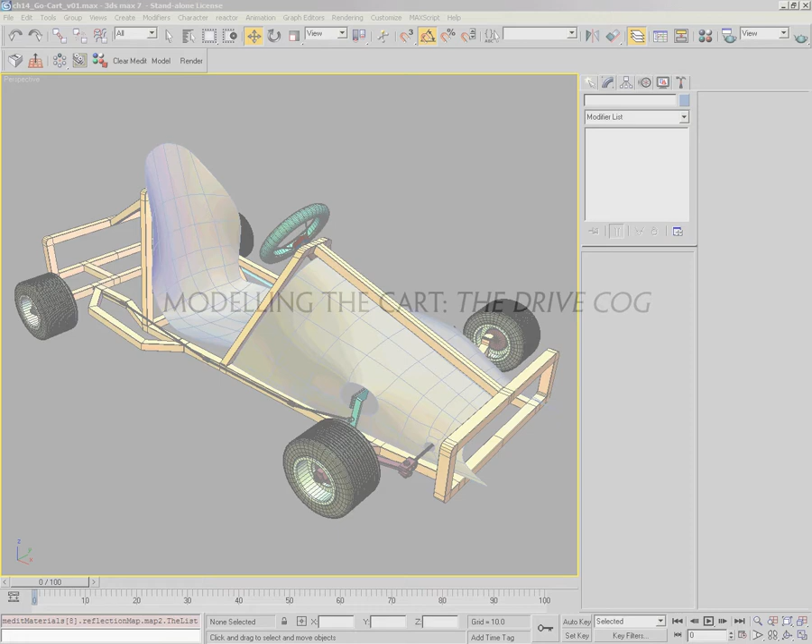In this chapter, we're going to finish off this section of the DVD where we've been modeling elements of the go-kart using sub-Ds. We're going to finish off with a little bit of a tough nut, so I'm just going to hide the elements we modeled in the last chapter, and focus in on this cog over here.

What I'm going to do is put some smoothing on it to make it a little more interesting looking, and then put some teeth along the edge here to make it into a full cog. But before we do that, let's put an edit poly modifier on here, and make some changes to the model.

Firstly, I'm going to get this edge here, do a loop selection, and pull it over here. I need to make this cog quite a bit thicker, so there we go. We'll do the same thing here, loop, pull it over. Let's do this from the top view so we can see that it's even. There we are, that looks pretty good.

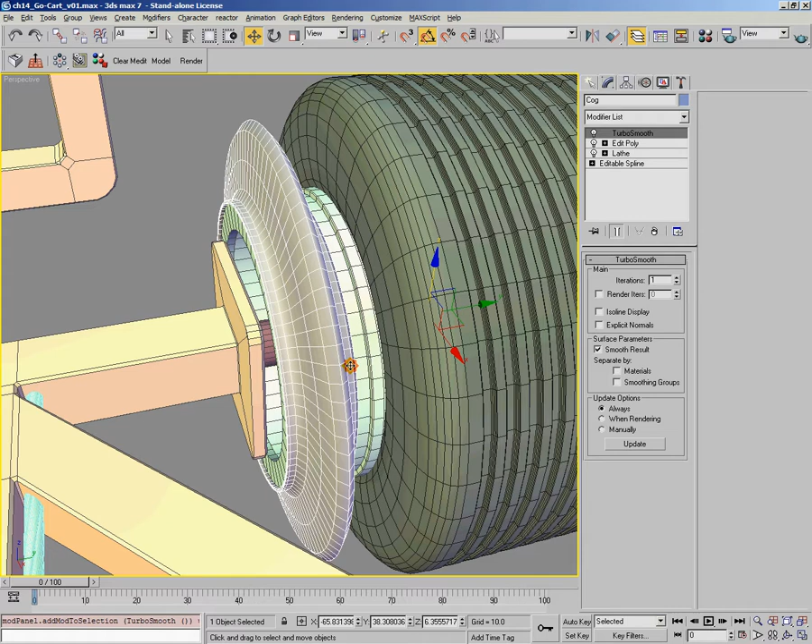Now if we put a sub-D modifier on here, let's put a turbo smooth on. You can see one of the problems immediately is it becomes too soft. We've basically lost the hard edge form, which I really want to keep because this is a cog.

It's an engineered item. It would be lathed, and then I guess the teeth are welded on, or it could be cast I suppose. But basically it would be a relatively hard edged item.

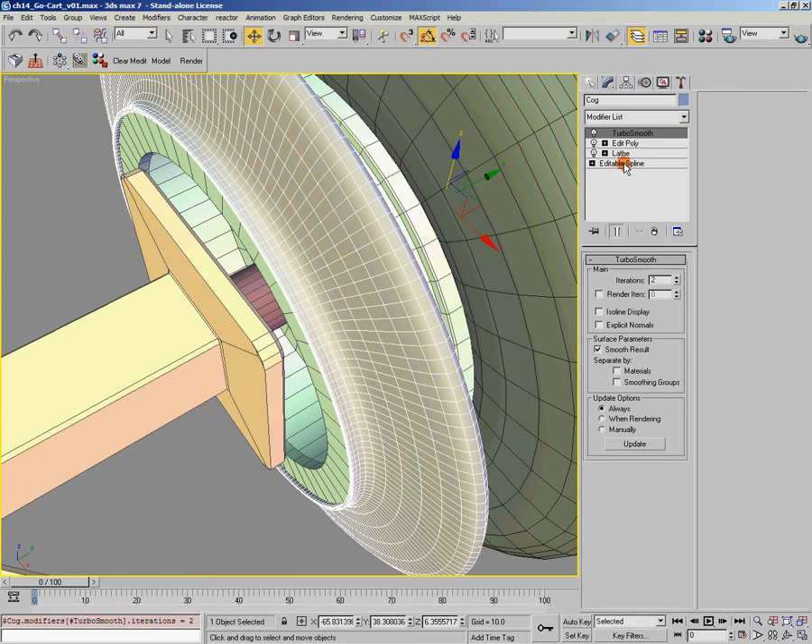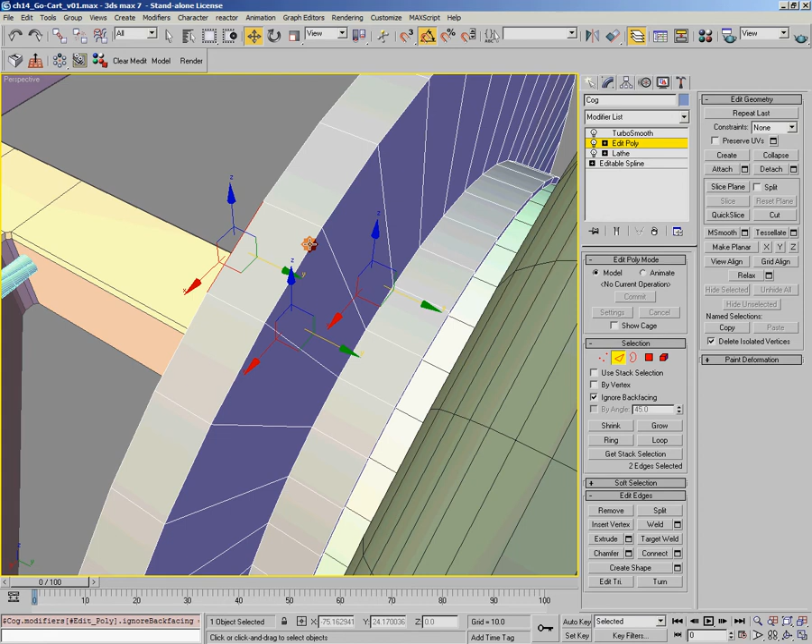So let's go back down here to edit poly, go back into subobject mode, and what we basically need to do is add some beveling into these edges here. This is already beveled, so we need to get this edge here, this one here, this one. Let me just turn on ignore backfacing, makes selection a little bit easier. Basically any edges which aren't beveled.

There we are. I'm going to loop select those, so we've got all the edges going round. We'll turn on show end result, and then we'll just go and chamfer, and see what we get here. You can see this is going to give us our hard edges back, as you can see here.

Just cancel that, and we'll turn off end result because I want to see what I'm doing here. I want to make these nice and hard, so let's go chamfer, put up some values here, and then we'll put some more edges in here. So we'll just apply that. Let's go like that, apply, and then we'll make a smaller value here. Yep, that looks pretty good. Okay, that, and have a look up here.

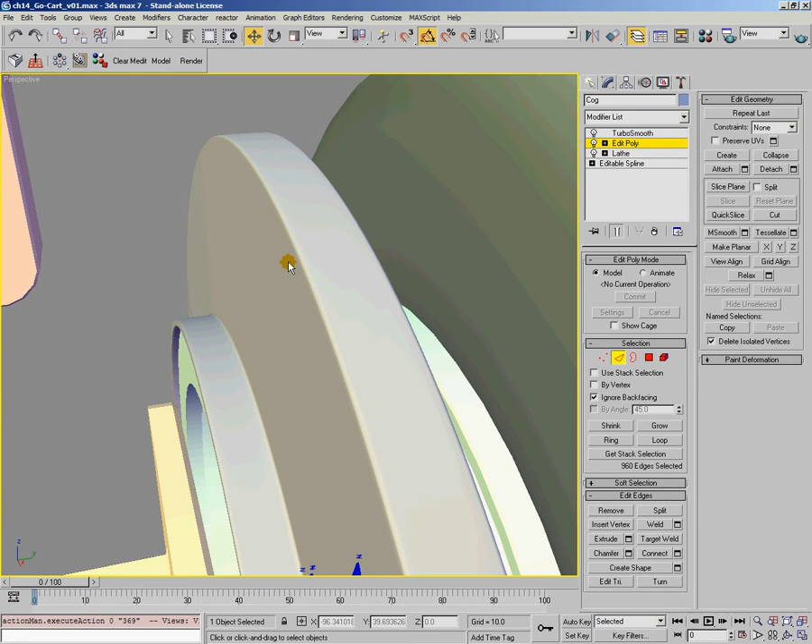Yeah, that looks okay. If we show end result, you can see now we've got some nice hard edges there. But even though I say they're hard, they still have bevels on them, chamfers, which means they'll pick up the light a lot better. So that's the basic part of getting the sub-Ds to work okay on here.

What we need to do now is the teeth. So for that, let me just put wireframe mode back on here, and go back down to the base mesh. Turn off show end result, and what we want to do is get one of these faces and detach it here. Let's shift copy that, copy it to an element, go up here, detach, and now it's a different object. So now I can actually go out here, and we can just select this object here.

I'm in a bit of trouble getting it selected there. There we go. So the first thing we're going to do is go into subobject mode, and I just want to make sure I can isolate this from all the teeth around it. So I'm just going to select here, connect, and turn on edge here, slide this into position here, connect. Let's try and get it as even as we can.

Okay, now what I want to do is extrude this out somewhat. Let's zoom out so we make sure we don't extrude it too much. That's obviously a bit too much, so let's dial this down. Group normal is okay, so we're just going to roughly get this right.

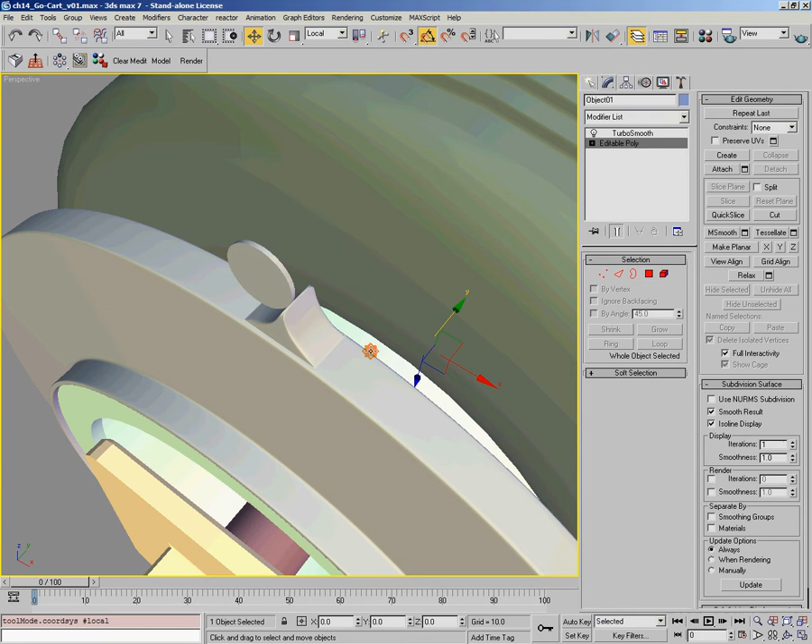Now what we need to do is just repeat this all the way around. And what I'm going to do is turn off Turbo Smooth. I'm actually going to delete it because we really don't want to have Turbo Smooth applied at one level as we do it next. Now there's two ways we can create the teeth on this cog.

We can either instantiate this individual cog tooth you see here and keep them as instances, which would probably be the most efficient way to build this geometry. The other way is that you could copy all of these teeth and then attach them together again and turn them into one object. This would be maybe a little easier to handle, but it wouldn't be as efficient in terms of rendering, because a lot of rendering engines have the ability to handle instance geometry in a much more efficient manner.

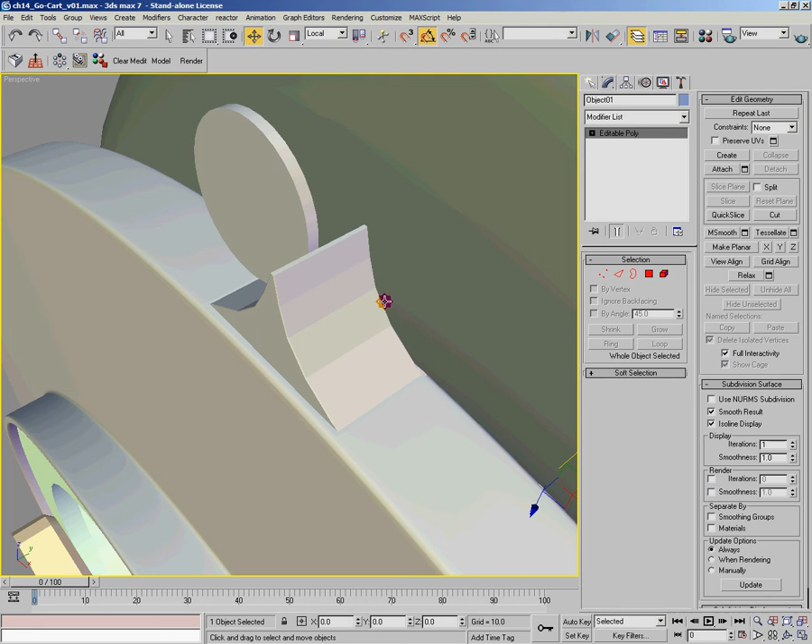So what we'll do here is, first of all, we'll just create this geometry going round, and then we'll decide what we're going to do with it. So create it first as instance geometry, and we'll give it a name so we can recognize it more easily.

So let's just select the cog tooth, and we'll call it cog tooth 01. It shares the pivot point of the original lathe it was built from, so we don't have to get the pivot point of this and align it to the lathe. Because it was detached from the lathe, it has the original pivot, so we can basically array around that point.

So I've got the extras tool panel visible up here. I've added a couple of extra commands which allow me to change whether I'm using my modeling lights or my rendering lights, and those are just simple macros. If you want to find out about macros and Max scripting, check out our Max Script Fundamental DVDs, where you can find out how to create little macros like this to, in this case, turn on some lights and turn off other lights. This script basically does the opposite, just turns on and off the opposite lights.

But in this case, I'm not going to use a custom command. What I actually need here is the array tool. So what I need to do is array this tooth around a circle, and if we go back and look at the original lathe, you'll see it has 48 segments. So we have to use that many segments to get a nice match with this.

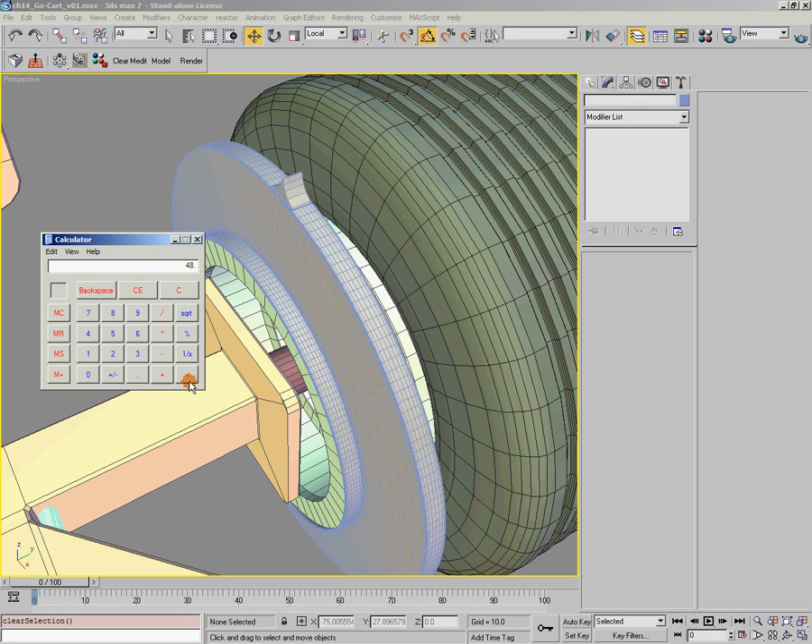Let me just get out the calculator here. Here's the old Windows calculator, and we'll do a very simple piece of maths. 360 degrees divided by 48 cogs equals 7.5 degrees per cog.

So we can now select the cog tooth and run the array tool, as you can see here. They improved it greatly in a recent release of 3ds Max, I think it was version 7 actually, and they added the ability to preview what you're doing either as a box or as actual geometry. We'll turn that on, and that will show us our teeth.

You need to find the axis you need to rotate around. You can see here you can actually array by moving, as you can see, or you can do it by rotating, or you can scale - you can create scaled arrays.

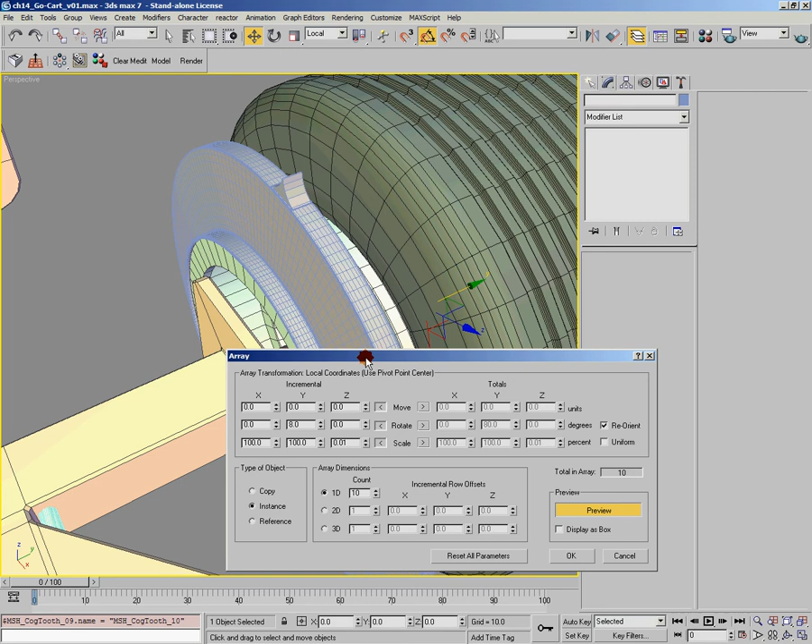Now in this case we need to do a rotation, and we know it's 7.5 degrees, and I know from previous experimentation that it's on the Y-axis. So if we crank this up here... actually it doesn't seem to be working correctly. Let me just cancel that for a second, and let's just go to view. There we go, and we'll run the tool again.

So let's just try that again. Turn on preview. There we go. It was because we actually had local coordinates turned on, so it was creating an array around its own axis, which wasn't quite correct. We needed to change it to view to actually be on the y-axis.

So that's it with 8 degrees. We know we need 7.5, so we're going to have to do a type in. And we need more than 10 teeth, we need 48 in fact. We just increase the count until we have, oh yeah, 48 teeth. As you can see, it matches it perfectly. So it goes around 360 degrees, 7.5 degrees per cog. 48 cogs gives you the full 360 degrees.

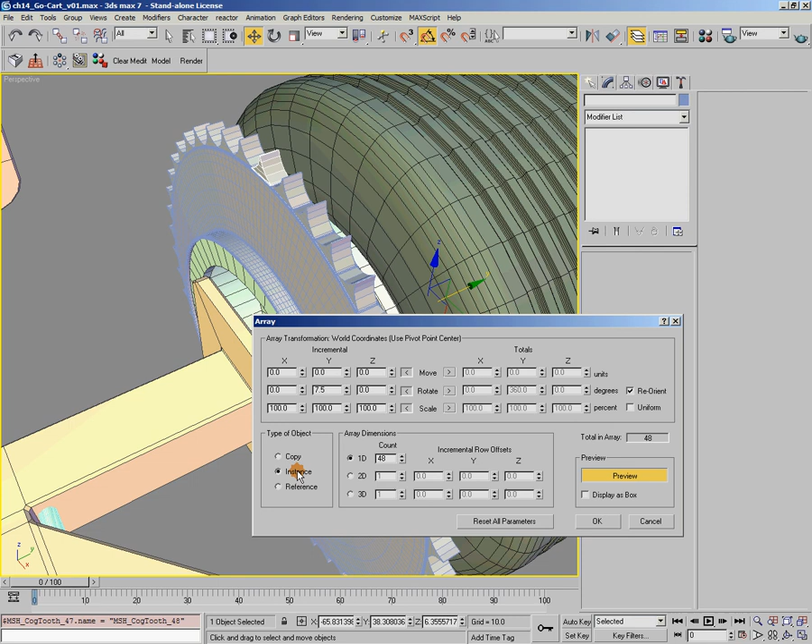And type of object, we can either do copies, instances, or references. In this case, we're going to go for instances. So we'll just OK that. And there we have the teeth, as you can see. And all we need to do now is put some smoothing on there. Let's just go turbo smooth. This will be an instance modifier because these are instanced objects.

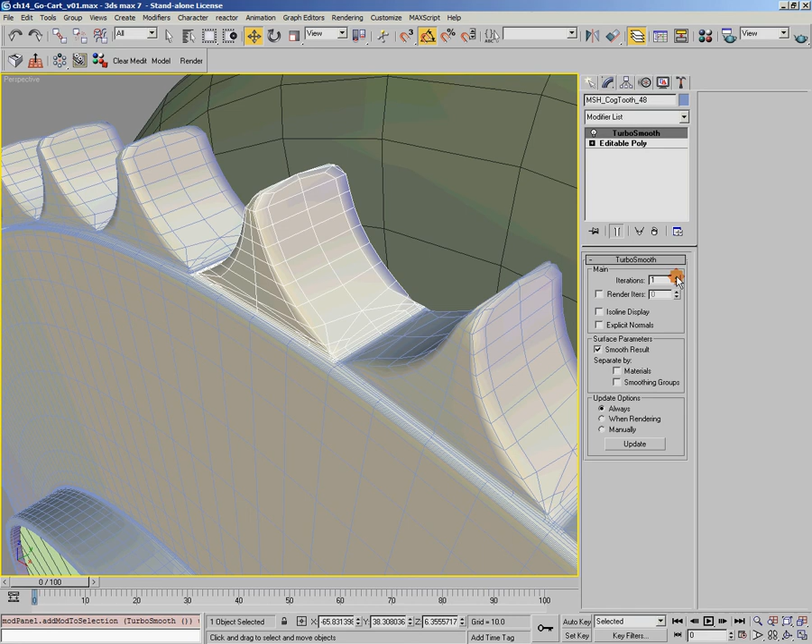So we can just choose how much smoothing we want. Because these are so small, we don't really need that much smoothing. 2 levels of smoothing is probably just fine. If you look at this, you're going to be seeing it from a distance, and you can see it looks just fine with 2 levels of smoothing.

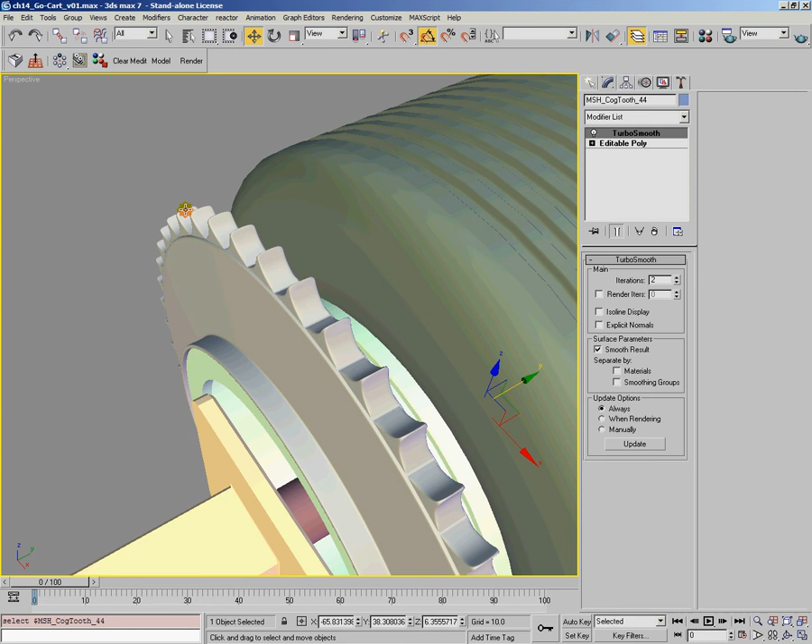At the moment, all of these objects are instances and they're individual objects. So you can see I can select each one individually. And what I would do is to actually make the cog work better. If you actually rotate the cog at the moment, the teeth aren't actually going to go anywhere. So that isn't very good.

So what we need to do is select all the teeth. Let's just go into this dialog here. Let's find the teeth, there we are. There'll be 48 of them. Select all of those. And let's just go here. Using the link tool, we can now link all of these to the cog.

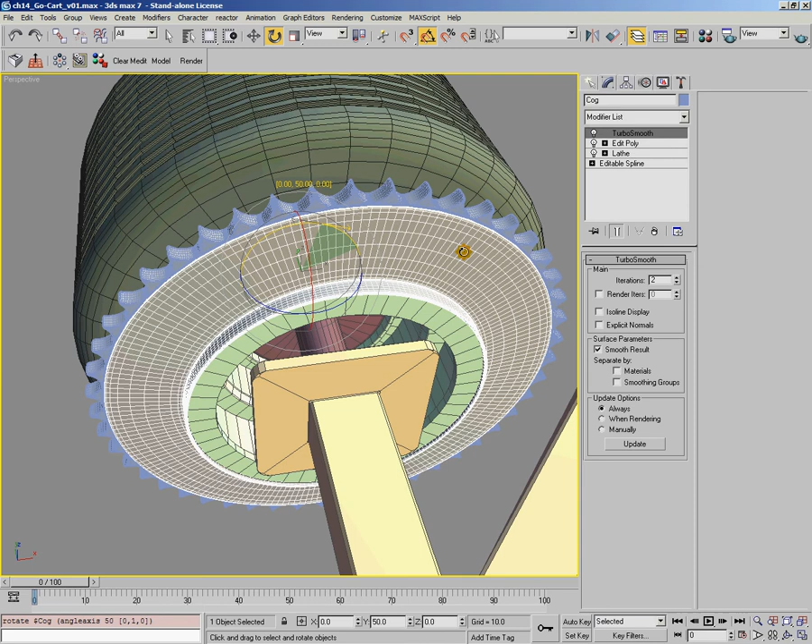And now if I rotate the cog, all the teeth should rotate as well, as you can see. They're rotating just fine. And that's actually probably the most efficient way you can model the cog, because it means that all of the teeth are instances, and therefore at render time, most rendering engines will just have one copy of that piece of geometry, and they'll just translate it at render time into the position they needed to be in for rendering. So it's a very efficient way of producing scenes by using instance geometry.

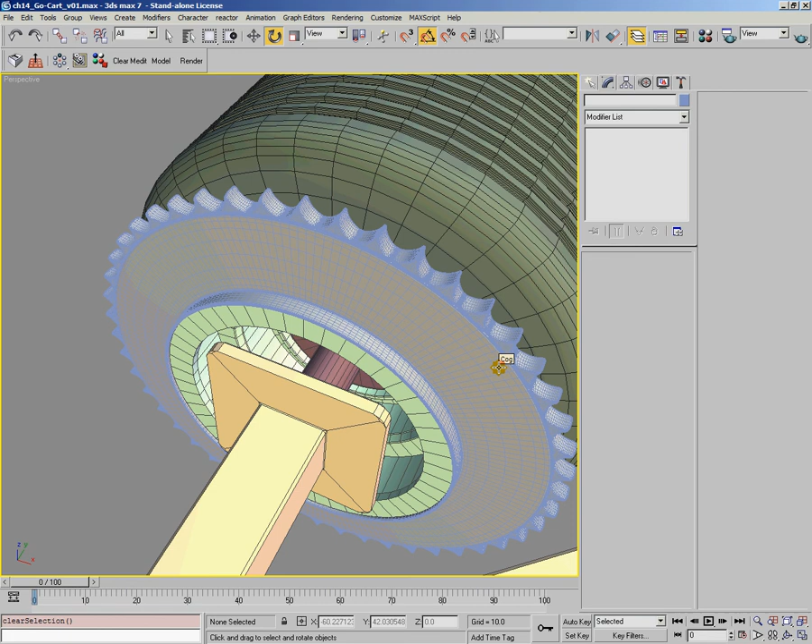So that's basically it for this section of the DVD. We've modeled various elements here: the running board of the car, the mudguards, the seat, the hood, and we finished off here with the cog. As you can see, sub-Ds are very flexible in what you can do with them. You can model very large, flowing organic objects like the hood of the car and the seat, and you can also model quite tight, sharp, engineered objects such as this drive cog that we have here.

Now, in the next section of the DVD, we're going to come back to many of these elements, and I'm going to show you some modifiers and techniques that you can use to make your modeling workflow a little bit more efficient and effective. I'm also going to show you some ways that you can optimize your scene so that display takes a little bit faster, meaning you can show more polygons and have the polygons only turn up in your scene at render time. So I'm going to show you some optimization techniques for getting your scene usable by animators and production people, and to ensure that at render time your geometry comes out at the highest quality possible. So let's move on now and go into the next section.